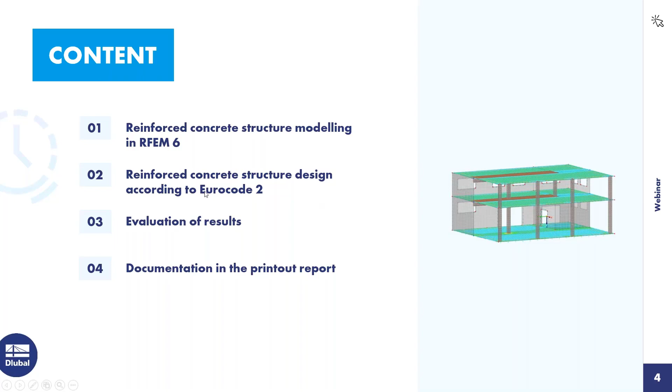I will document our calculation. I will go now directly into the structure, the RFEM structure. The structure was already defined from the members and the slabs. I'll only give you a short overview about the used objects.

The basics of the reinforced concrete design, and also the design of members, the reinforcement, definition of members, also the design by using the member representatives, if we have more similar members, was shown in the first webinar for reinforced concrete structures, which was made or shown in November of last year. There are shown the basic steps of how you can define the properties and the settings. My colleague Caroline will write the link into the chat where you can find this webinar. It is very good for the beginning.

So therefore, I will go now today into the design, especially to things which weren't shown in the first webinar. The punching design was not shown in detail, and also not the rib design.

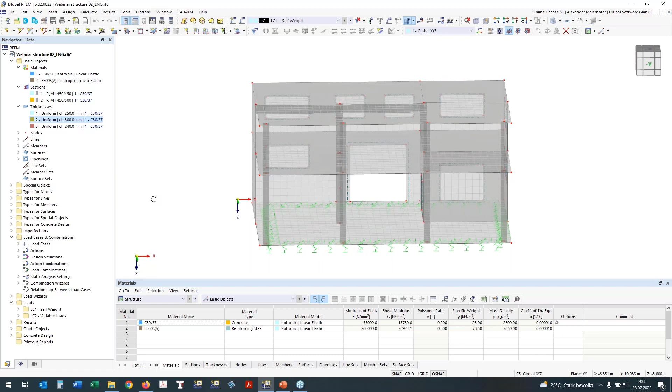The building now has elastic springs, so elastic support, and this will also have influence later in the settings for the deflection design, which I will show you.

At first, I want to deal with such nodes where we have the connection between the columns to the slab. Here we should place mesh refinements to have better FE mesh.

For this, I go to the data navigator, where by double click I can open a new nodal mesh refinement, give there my settings, which I have for radius 1 meter, and the inner target FE length is 15 centimeters. It comes from the dimension of the cross section of the columns.

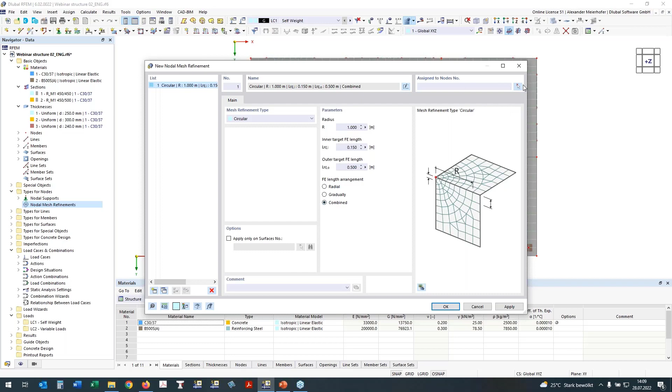For the length arrangement, I use the combined approach, and now I will assign the nodes with two rectangles where I want to have the refinement. If we take it through in the isometric view, we will see I have it catched, and everywhere was now my mesh refinement.

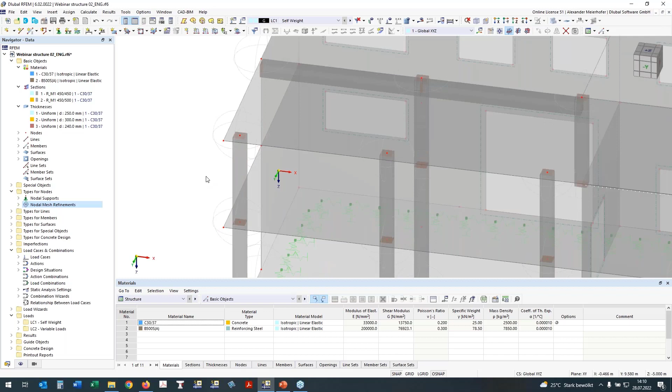On these nodes, from the column and the slab, we have also singularities, and how we can deal with these singularities in the concrete design is described in a very good knowledge base article on our website, which I want to advise you. Caroline will also send the link to this technical article in our chat, so you can find it very easily.

I will continue and select one approach, which is the use of the surface result adjustment. It means I will select or define the area which is exactly the width of the column, and set there the inner forces of the surface to 0.

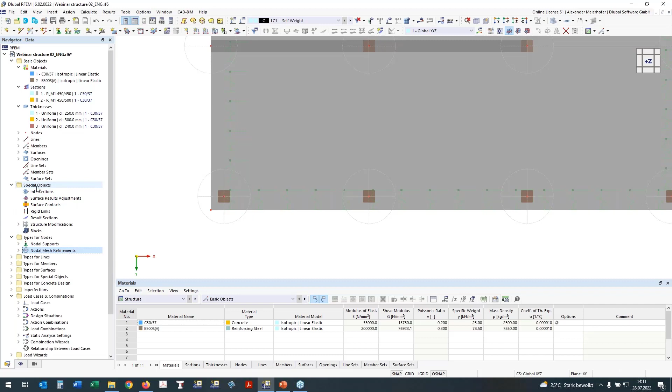Surface result adjustment can be found on the special objects. By double click, I can open the dialog, and now we can define a new rectangle result adjustment with the dimension of our columns.

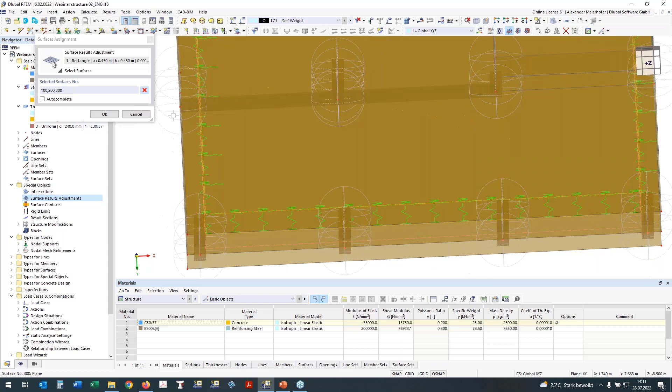I want to have it on all 3 surfaces, and you see the number of my surfaces was so chosen that I know where it is placed. So 100 is the slab on grade, 200 the slab over the ground floor, and 300 is the slab over the first floor. If I press OK, I have already assigned the surfaces, and now I have to define the center of my adjustment.

Here by copy, I can simply copy this adjustment and set only the new center of the result adjustments, and then I will have it in all areas.

I make one new and want to define it also over the wall. The width is 25 centimeters, and I defined a little bit bigger area, and defined it here because here is a wall. Define it also in this area.

I made one mistake. Now I forgot to define the adjustment type. I want to set it to 0, and I want to set all inner forces to 0. This should be done for all.

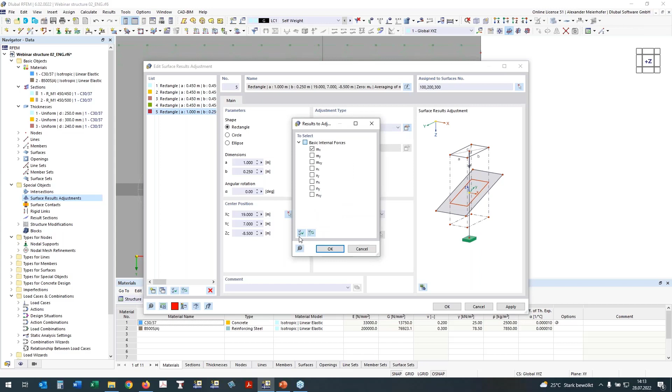To all defined adjustments. So I was one step too fast before. This should be done before I copy it, and then it is also always in the right setting. By OK, it will be placed.

We can see it, and we can also work here by drag and drop. We copy it by drag and drop. If we press the Control key, you can put it by drag and drop, and it's very simple to work with it.

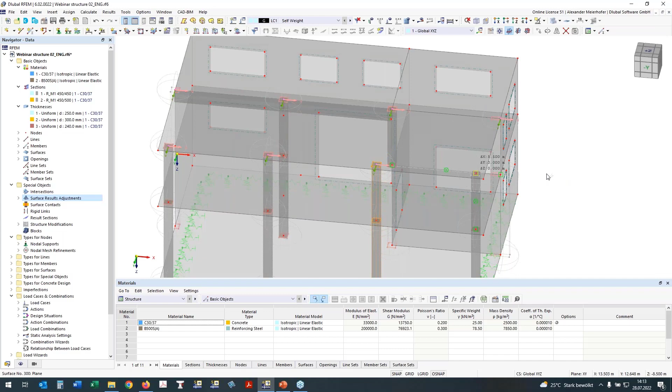So this is then for the connection of the columns to the slab. One additional setting for the slab is necessary. I want to have here hinges over the length of the supported line.

The definition is very simple. We make double click on the surfaces, and the edit surface dialog will be open. Activate hinges, and in hinges I click to select lines, press Control, and then I have selected 3 lines where I want to have hinges.

And the hinge type is by default already the moment hinge, and I will put it to all lines, the line hinges number 1. Okay, done. It's ready now, and if we take a look at our refinement, it is placed everywhere, and also the adjustment.

In the display navigator, we can deactivate the mesh refinements because I don't need it anymore for the work now, and the graphic is then more clear for the presentation.

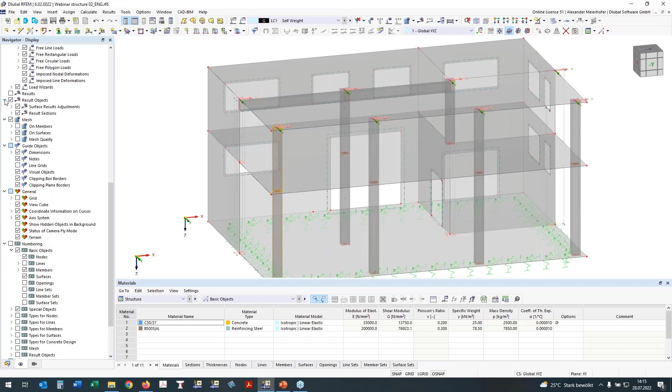As next step, I will define the rib for the slab over the ground. For this, I will hide the first floor by selection, and now I have the first floor.

By using new member, I can define now section rib by selection of the section number 2, which should be used for the web. The web should be 500 millimeter high.

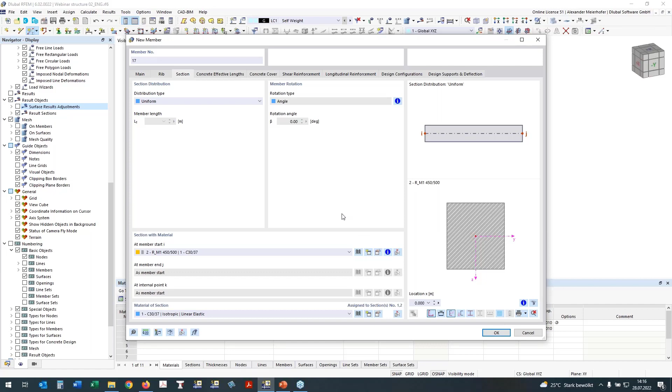I can define now the rib from here to here, and also from here to here. Oh, something was wrong, okay, I do it again.

I know what was the issue. I will make the selection new and select only the slab which I want to show. So the new member is the same section, section number 2, and then from here to here.

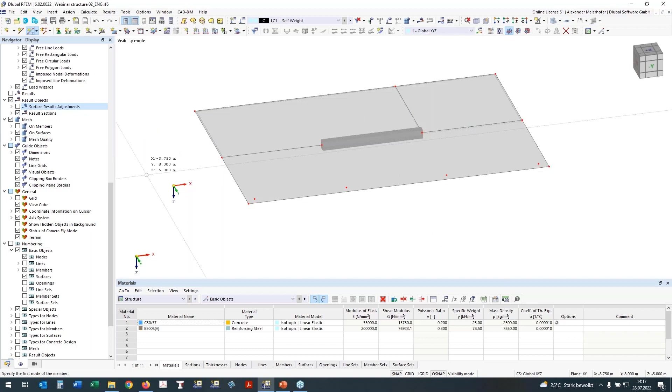By escape, I come to another point. So if we take a look at the complete view, in the first part I took care about the rib. I go now into the rib section, and this is a very new feature: we can now also define more sections or segments during one length of the members. This is completely new developed.

I use here the calculation of the width, integration width according to Eurocode 2, and the splitting of the segments can be done in 15%, 85%, and also 100%. Now we have more different integration points. Here we have an inner support, which means we have to consider for the calculation of the integration width the length of the neighbored span length. So I have to define here 1.80, and I have now my different integration widths.

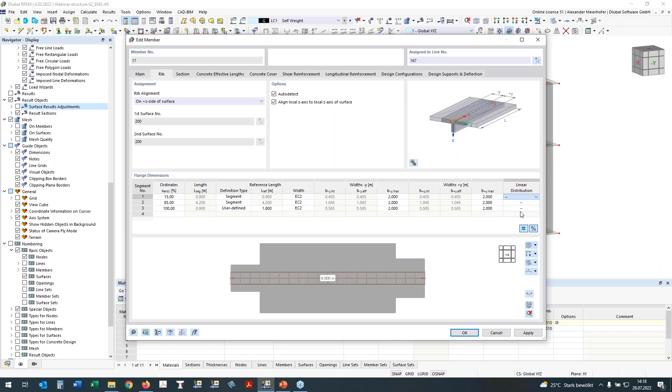We also have a new option here that we can make a linear distribution from the integration width, and now we have defined the rib for the design.

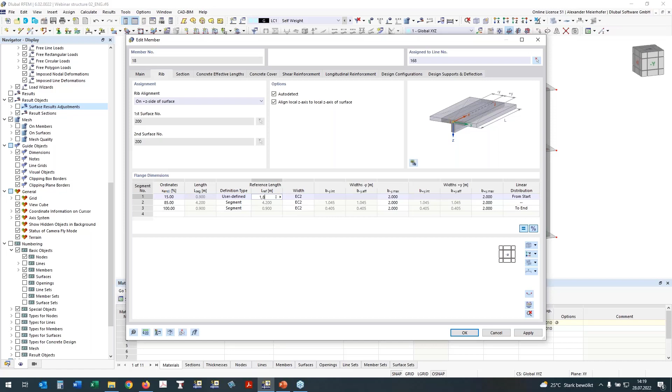For the second member, I use here the copy of object selections. It's a very nice tool. If I click here, we see that all inputs have really been copied, it's the rib, and the only thing I have to change is that the end field is related to the segment, which is for the user-defined 1.80. Then the inputs for the static analysis are ready.

And now I do it again, what I did before. A very nice feature from RFEM 6 is that we can now show the rib section also in the graphic, and we see that the integration width is also shown here in our main graphic of RFEM.

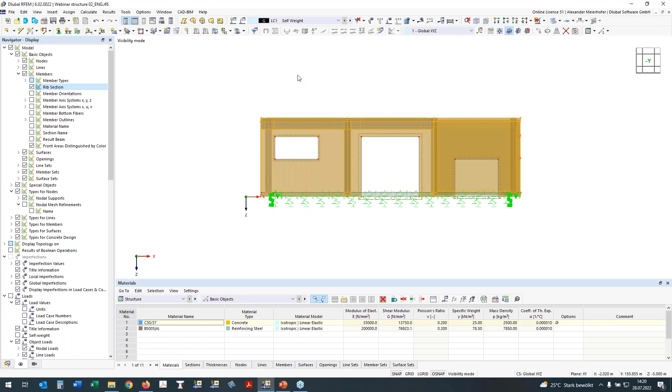Okay, now I will select again my slab here, and continue with the definition of the design properties.

The design properties for the reinforced concrete calculation are activated by double click. I come into the surface dialog, and I continue with the concrete cover. The concrete exposure durability is defined by the exposure class, which is default to XC1. This is what I leave, it's okay.

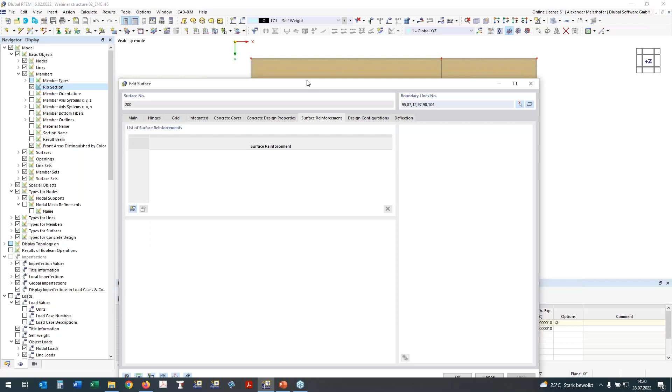The design direction of the reinforcement, the first direction, goes in X. This is also default, which I will not change. And here is one important topic: in the surface, I need a surface reinforcement for the diameters so that I will know the static depth for the calculation. I just design a type of basic reinforcement.

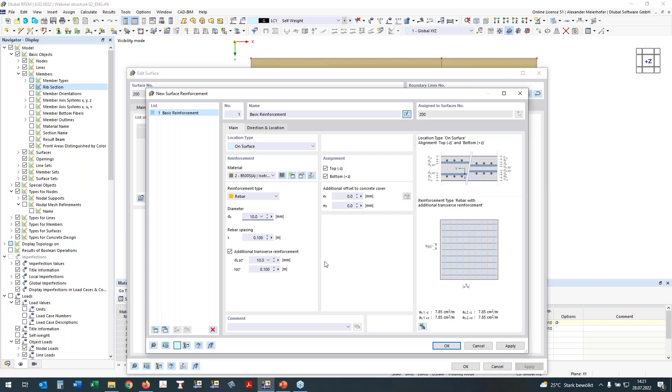Which will be in both directions, the diameter 10 with a distance also of 10 centimeters, and by pressing OK it will be assigned to the surface. Here are listed design configurations, which I don't discuss today.

This was covered in detail in the first webinar. I will later take a look at the serviceability configuration. But here's one very important thing which I mentioned before at the beginning: we have an elastically supported structure.

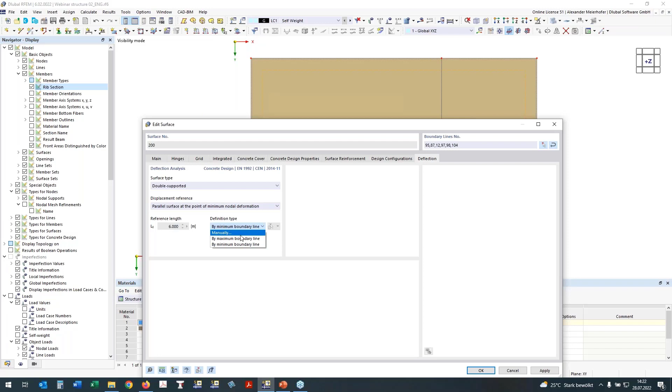Therefore, it is an advantage to relate the deflection also to a deformed slab or plane. Here I use the parallel moved slab as a reference plane for the deformation, and as reference length I will define it manually by 2 points, saying my reference length for the maximum allowed deflection is from here to here. It's about 5.5 meters. By OK, I have defined all properties for the reinforcement design.

We can also take a look into the graphic. If we go to the types of concrete, we see here we have surface reinforcement longitudinal, and if we activate it, we see that the reinforcement is defined in this area.

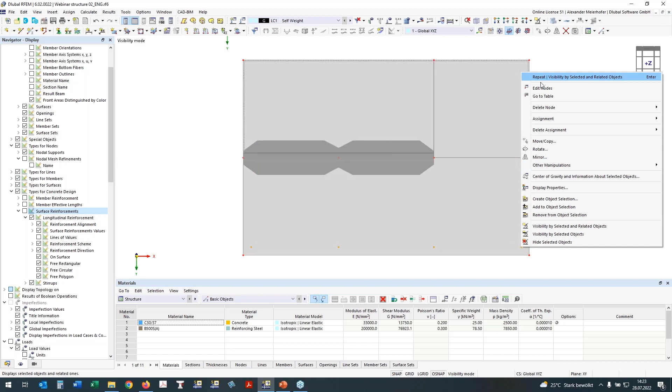Okay, I said that I will take care of the punching design of the nodes which are here. So as for all objects, we have to select it and go into the nodes or object dialog, edit nodes, and activate the design properties. Here it's only important for now that we check for design of the punching proof, and then we will have the punching proof assigned in the add-on concrete.

I will go now to the definition of the ribs. Here we need also reinforcement. I want to design not two members, I want to design it with a set of members.

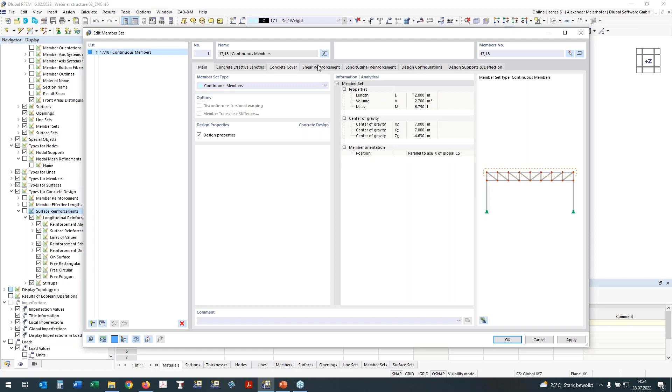So therefore I select both, press the Control key and say create a new set of member. And here we have now the new set of member, and I can say now design properties for this set of member, and we see that there was now open all inputs for the design properties. It means the concrete cover is now shown, and here we have also the same durability which we have already used for the slab.

Used for the slab is XC1 and the shear reinforcement. I will change the distance to 50 centimeters, and if we take a look in another view, then we see here the cross sections or the variable cross section of the rib is already shown here, and also there are the reinforcement, and I will go to the longitudinal reinforcement.

We see here the reinforcement which we have defined for the slab design or in the slab is here already placed. If we go more, we will see it. It is activated by this icon. If somebody doesn't want it, you can deactivate it or let it. I want it, so therefore I will let it here.

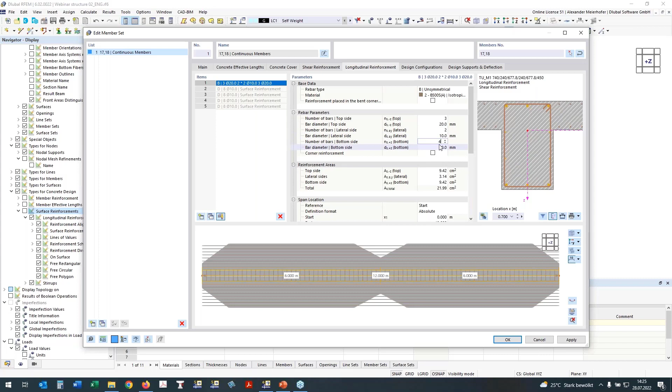But I will define now different distribution of the longitudinal reinforcement. I want to have it unsymmetrical here in the web. So therefore on the top side I will define here these three rebars with the diameter 20, but a lateral reinforcement also from 2 diameter 10. And on the bottom side I want to have 4 diameter 20. And it will be directly updated here in the graphic.

Here is also the 3D graphic of the reinforcement, which can be used for control of the inputs. Here we see a small reinforcement drawing, also the used shear reinforcement, which can be activated or deactivated. It's nice for control and for printing. Okay, I can close it.

Design configuration is the same like for surfaces in all parts, and now is one important tab. We have to define now the deflection properties or conditions. I want to check it only in the deflection in Z direction for the gravity loads, of course.

And here is the point: my reference is then the deformed segment ends. This is now also the point which I mentioned. We have an elastic supported structure, so it means also the supported ends will be a little bit displaced in Z, and this I don't want to have in the design check for the deflection.

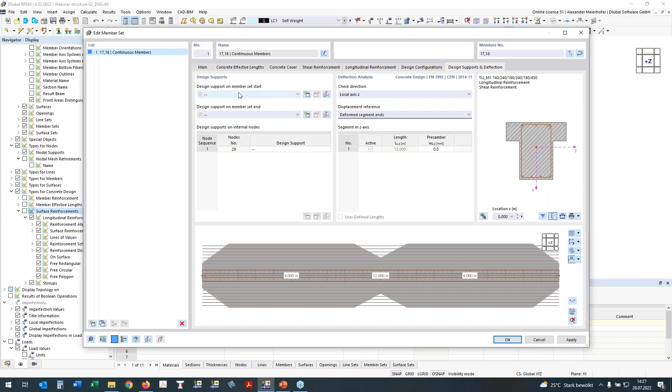Important is that I generate on the ends or on the middle some design supports. We have here design support in Z direction, and our wall is 250 millimeters. It's a monolithic connection, and will be used for the walls on the end and the start. I directly copy it and use here also the width for the columns, which are inner supports, and here I have to deactivate inner supports and press OK, and then it will be placed directly at the beginning.

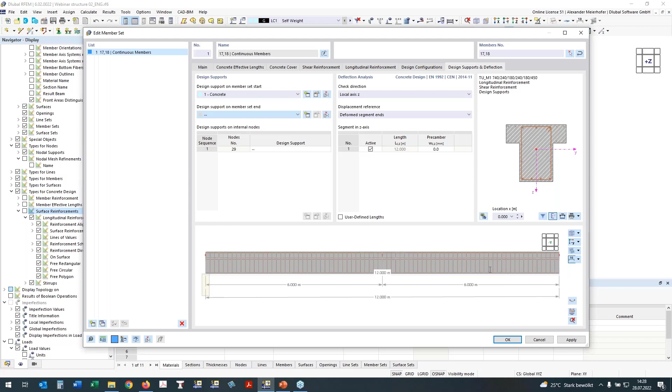I will change here the view to see it. Here we have the first one, and at the end it will be also placed, with the 250 millimeters width, and in the center I will also use the design support, but it is now for the column and it's bigger, it's 450 millimeters.

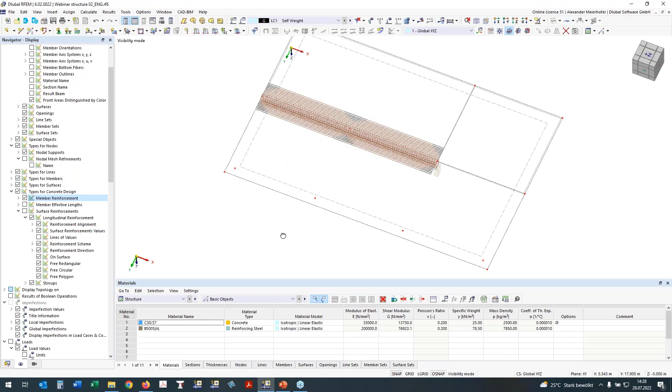And we see here now for deflection we have here some lengths, 6 meters and 6 meters, and if we have some pre-camber we could define it here, but in this case I don't have it. But okay, we can confirm the inputs, and also we can check the member reinforcement and display it, and see that everything is okay.

Before I start with the calculation, I will make now new object selections. Have to be a little bit bigger. Create new object selection, and the advantage which will be done with this object selection you will see immediately after closing the dialog.

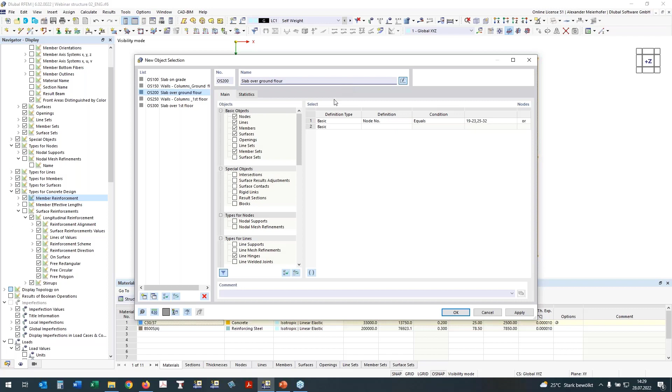This is my slab over ground floor, and I press OK. And now we have here in the object, in the guide objects, the object selections, and you see I have already done a little bit more, but the new one is the object selections number 200.

And if I go now to the concrete add-on, I can use the object selections directly to define all objects which are there in the add-on. It is then replaced, and it will only show object, and it is very good to organize the work.

Before I start with the concrete design, one hint where you can start, or what you have to check in the basic settings: you have to activate the concrete add-on in the design add-ons, and in the standards you have to define the used standard for reinforced concrete design.

Here I will use Eurocode 2 with the original rules, so without national annexes.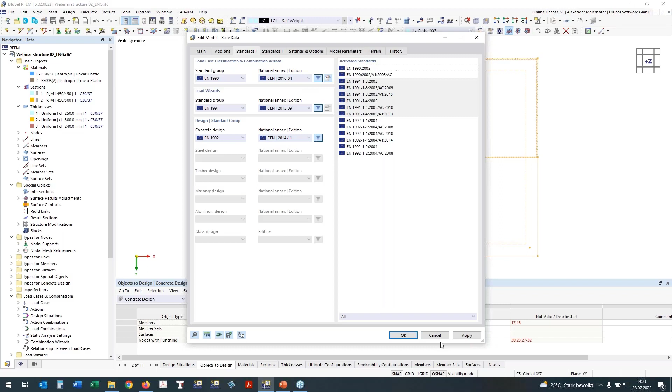If we have the loads, this is also one additional hint. I have defined a load case, self-weight and variable loads. We have to define the action category there - it's for the office. And in the base data, I have the combination group and the combination wizard defined.

And in the design situation will be automatically listed the serviceability and the ultimate limit state design situations.

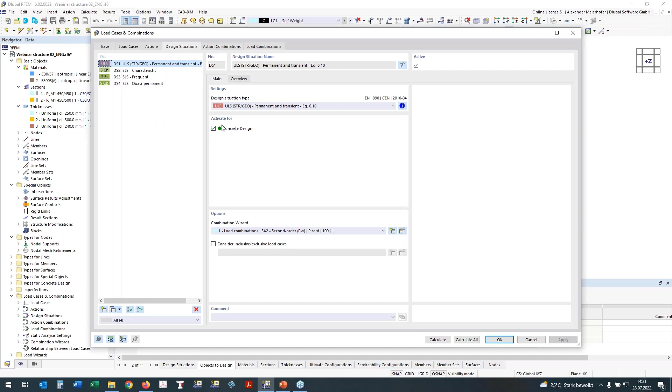Here will be the list of all activated design add-ons. Here we work only for the concrete design, so I activated concrete design, and all load cases which are related to this design situation will be calculated.

I can multi-select it, and what I have to do is select my combination wizard. The combination wizard is defined in this way that we generate load combinations, and the static analysis should be done by first order and geometrically linear.

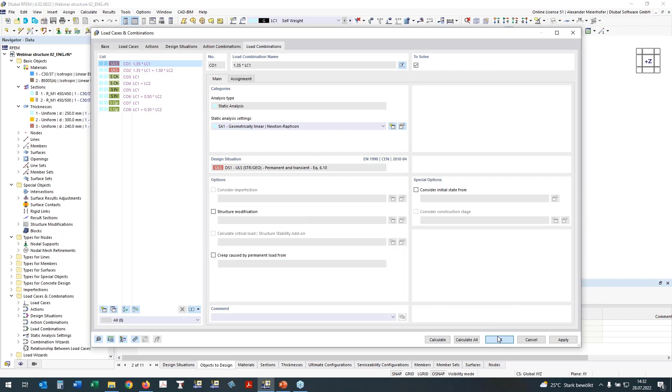If we go to the register load combination, these combinations were generated automatically and will be also used in the design of the reinforcement.

Now I go back to the add-on concrete. We have here already the designed object selections. Material and sections are only listed for control.

Here are the configurations or settings for the ultimate limit state. Here we have the serviceability state. I will take a look at the serviceability state configuration.

Here we have the stress check which should be done, or the crack analysis, done by finding automatically the limit value for the crack width. This is according to the defined exposure class - we have XC1, so I expect in the calculation 0.4.

With the deflection calculation, we have this L, the reference length, divided by 250. And here is the crack state detection for the serviceability.

I want to explain this a little bit more, because this is really new - we released it two weeks ago - so I'll take a little more time for it.

The first one is the crack state calculation for each associated load. So each load case or load combination will be considered and calculated for itself.

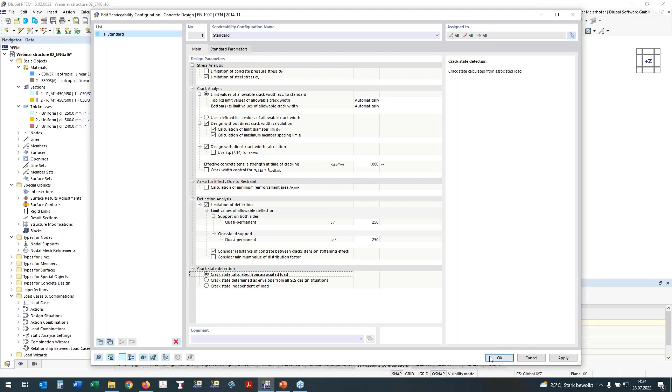I'll add it in the first setting and confirm it. Now I think we can start already the calculation.

Of the static analysis. So first the mesh will be generated, and as the next step the static analysis is done.

You see here we can now use more cores of the PC. I have 4 cores, and there will be 4 calculations done in parallel. It is very fast.

Here in the concrete calculation will be done a pre-calculation for the stiffness, checking if there are cracks or not. Then a second step of the finite element calculation is done, and the deflection is calculated.

In the last part of the concrete design, the cross sections will be designed, and the results will be prepared for display, in the tables, and also for the graphics.

Okay, so now we have an overview of what is fulfilled and what is not. We have very detailed tables. This work with the tables was also shown in the first webinar.

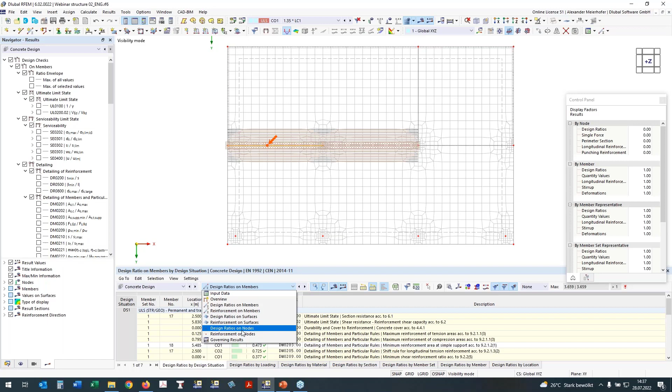Design ratio for nodes is also new, and this is the design ratio for the punching proofs, and we see here it's not fulfilled.

I will go now to the graphical results, and firstly we took a look at the results of the surface. I want to activate it as only extreme values, and here we have the panel showing the ratio of the defined reinforcement, the ratio between the provided and the needed reinforcement.

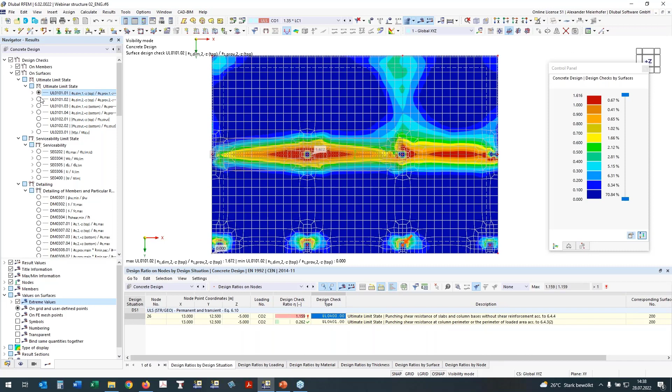In the red areas we have less reinforcement defined. On the top side there is also a punching problem, and I would expect more reinforcement for the punching design. If we look at the bottom reinforcement in the first direction, everything is green, under 1, except a small part with the maximum ratio. The second direction on the bottom reinforcement is also okay, with a ratio of 93%.

The punching proof of these nodes is now shown in the tree register for nodes. If we activate the vEd for nodes and vRd,c, we see the corner columns can be designed, but the columns in the center are overloaded and need more reinforcement.

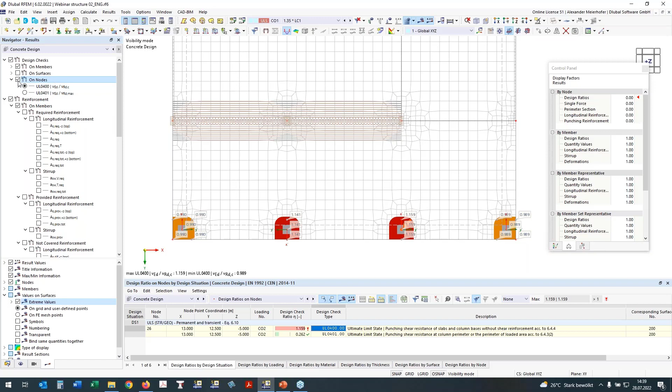To work with it, I will go to the reinforcement and take a look also at the nodes to show if we need a required punching reinforcement. Here we see for the required punching reinforcement we need zero, but we need longitudinal reinforcement. In the configuration I said please calculate the required longitudinal reinforcement to avoid shear reinforcement, and we see that if we place 12 or 13 centimeters, everything would be nice.

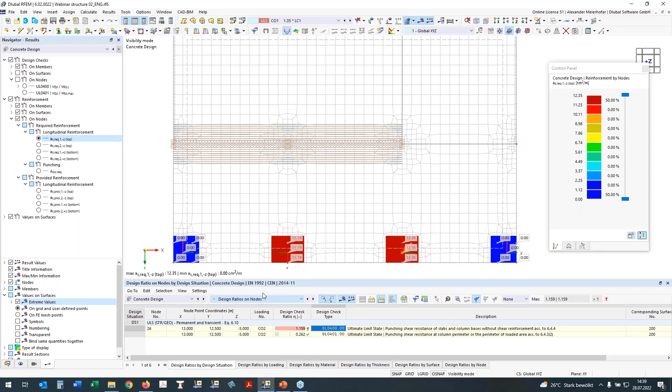I will now define the missing reinforcement. For this, I will go to the global settings of my module add-on and deactivate the deletion of my add-on results if I change the reinforcement. Now I can work in the inputs. I deactivate the mesh so that I have a nice view, and go now in the result navigator to my types for concrete.

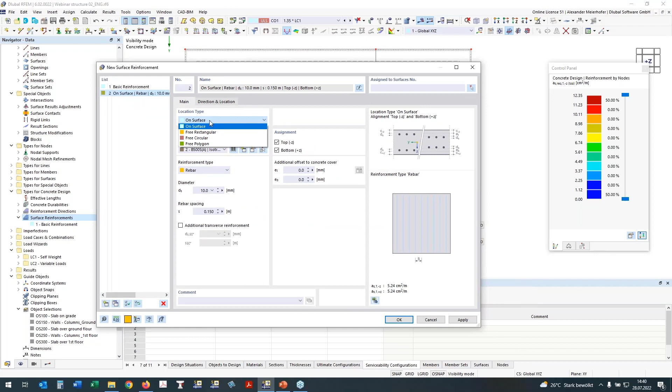For types for concrete we have the surface reinforcement. With new surface reinforcement I generate a new one, which is a free rectangle area. I assign it to my surface number 2, and the missing area here for punching is about 7.8, and I want to have it only on the top direction. Here is the area which I want to define. I activate my grid to have good coordinates, so I have a grid of 25 centimeters, and this area is already defined.

I copy it like it was for the advantage result adjustments of the surfaces, and I can really use the same concept here. Now I want to do the input also on the other missing parts.

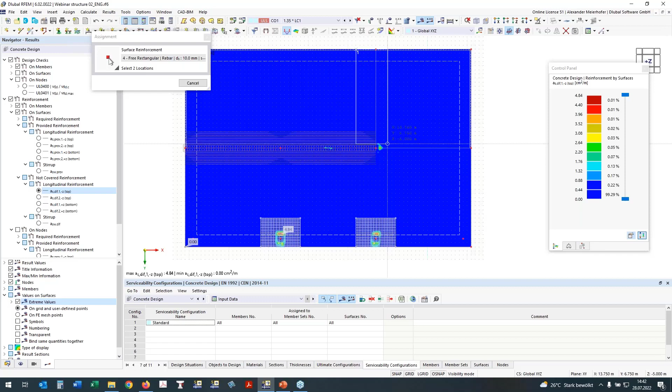For this I copy the existing one and go in the result navigator, so we can activate the graphic we want for surfaces, and say the surfaces have uncovered reinforcement on the top side in this direction. If we take a look here, I will define the same area over my supported line in the first direction, and in the second direction I will do the same area, and take a look what is here. Here I need some reinforcement too, and took it over this length.

It was a little too small, so you can also make it again, and by pressing OK it is then confirmed and in the structure.

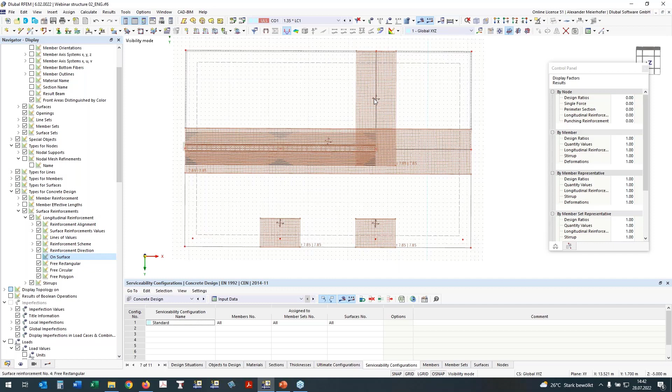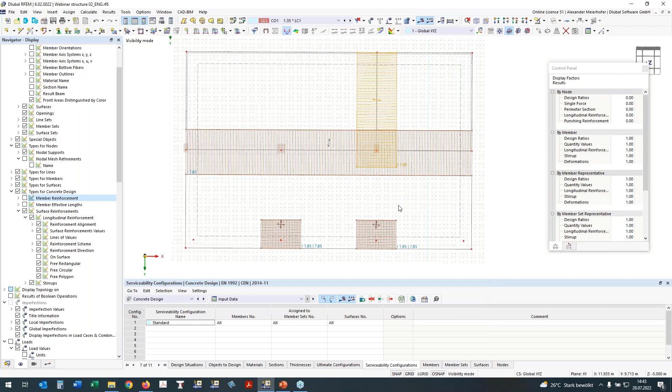For the surface, I can then take a look at where my surface reinforcement is. I go to the surface reinforcement and deactivate on surface, and we see what part of reinforcement is defined, and I can also check if the direction is right. Here I defined one thing too much, so I only want to have one direction, and it's the same here. By OK we will see I have only one direction. So easy is the definition of this additional reinforcement.

Now I want to take care about the reinforcement in the rib. For this I select it and change the view, and generate also a new object selection, which will be named the T section.

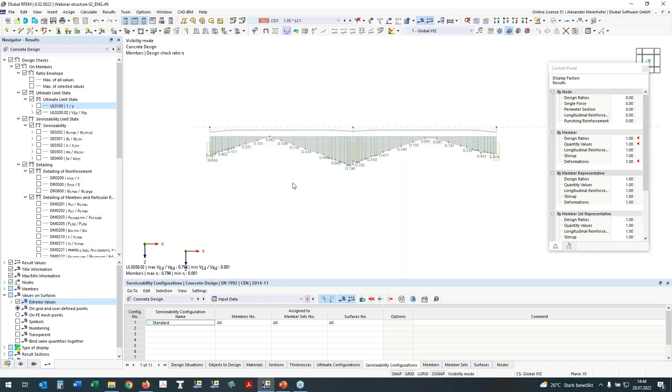Press OK. And here I work now with the design checks on members, and take a look how my cross-section resistance is. We see I'm under 1, so everything is nice. If I take a look at the shear reinforcement, the shear proof is also fulfilled, so I need no additional inputs. The serviceability is done in this way, that the stress of the steel is checked.

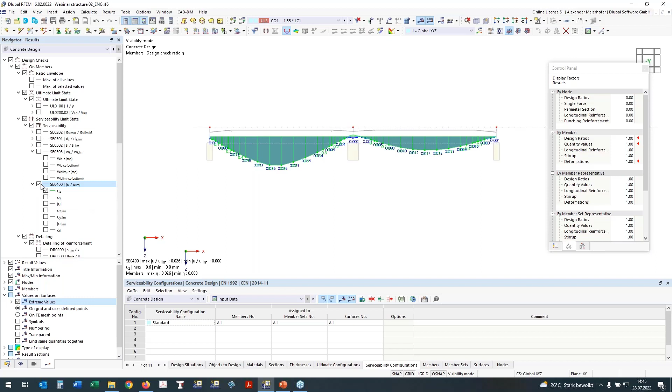You can activate here also the direct value of the crack width. For example, we have here only 0.026, and it is also for the deflection. The ratio is very small, and the existing deflection is now 0.6, and we see here it is related. Here is the end, it goes to 0, and this comes from the relation to the deformed structure.

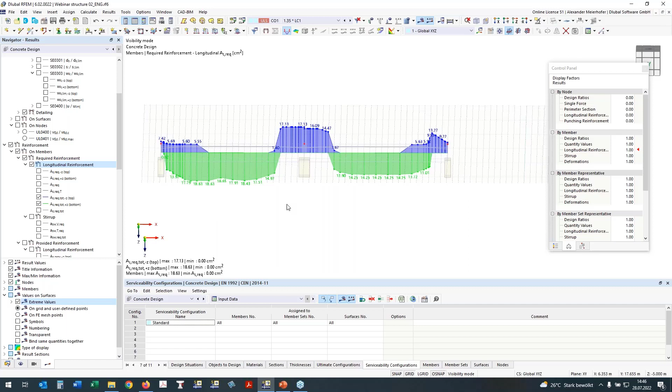Okay, if we take a look at the required reinforcement, it is also here in the table. Required reinforcement of members, As top, As bottom, and we can take a look at it. You have here the graphic.

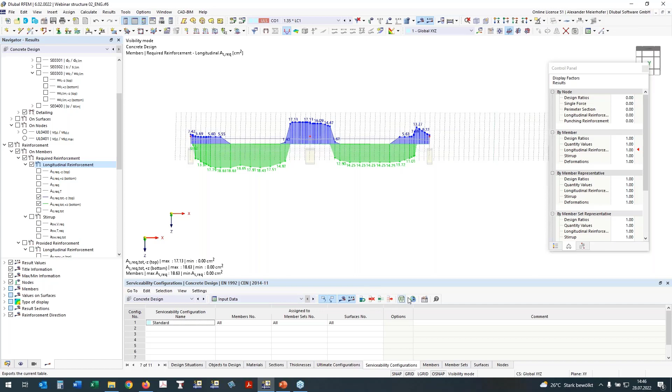If we want to print it to the protocol, we have to generate a new protocol. And what we have to consider is that the calculation must be done again. We change the reinforcement. For this, I go to the global settings, activate the deletion of the add-on results, and then it will be updated and deleted. Now I have to start the calculation of the concrete design add-on again. You can do it also here in this icon and start only the calculation of the add-on.

The statically analyzed results were not deleted because the reinforcement has no influence on it. Now it is only the calculation of the add-on concrete, which will be refreshed and done again. As I said before, this is a two-step calculation. In the last step, we have here also again a concrete calculation for preparation of the results and the graphic.

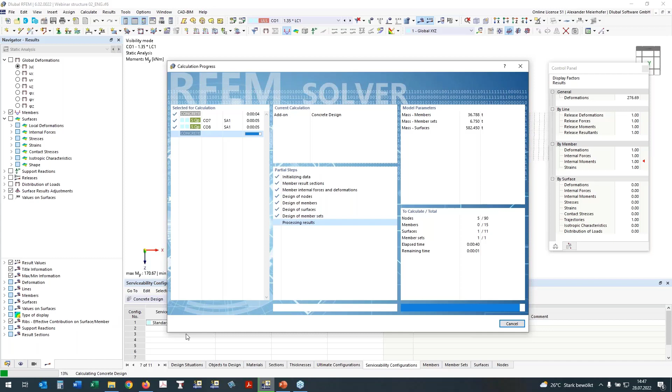So now we have the updated results. Design ratio by nodes, by members is okay. Then I will go to the printout report in the navigator and show you very simply the work with the printout report.

If we generate a new printout report, I make it here for the concrete results or the concrete design, and assume that all other documentation of the static analysis will be done separately in another printout report. Today I want to show only the design or the report of the concrete results. So types for members, types for surfaces we don't need, but types for concrete design is necessary for the concrete durabilities and the surface reinforcement.

What I also need is here the concrete design, which we have to discuss maybe also what is necessary. We see here it is possible to show every tab which is also available in the add-on. It can be printed, but I want to have here only the design ratio by set of members. For nodes and for surfaces, the reinforcement for members should also only be shown by member set, because I design only the member set. The provided reinforcement by member set, the not-covered reinforcement I will not show.

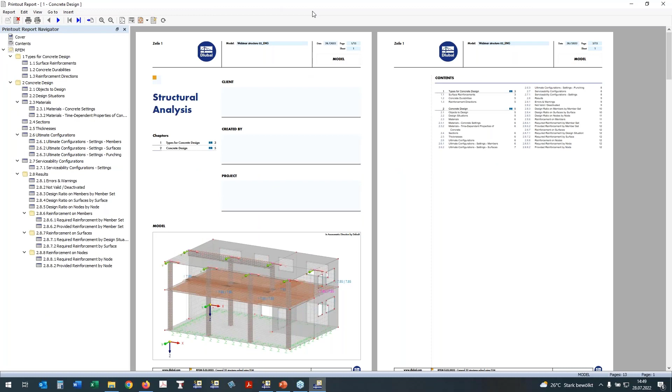For the reinforcement by nodes, I let it as it is. The design overview will be deactivated. By save and show, it will be generated, and the result, the printout report, is one of our new developments in RFEM 6. It is completely new. It is a separate file instance, which can be used here.

It can be opened parallel to the RFEM calculation, and if we take a look at our results now - result members - then we go through results of set of members. Here is one green, one is the crack control, which is overloaded - this we can check later. Detailing is 1%, it's okay. So from my side, it's okay.

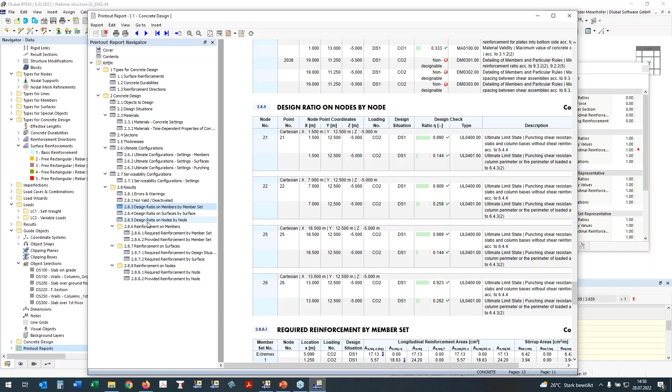For the design ratio of the nodes, the punching design - all ratios are fulfilled. If we go to the required reinforcement by member sets, we will see the list of the required reinforcement. Here I want to show also the point of how we can print the required reinforcement, because in my eyes a picture is better, a diagram, than many tables.

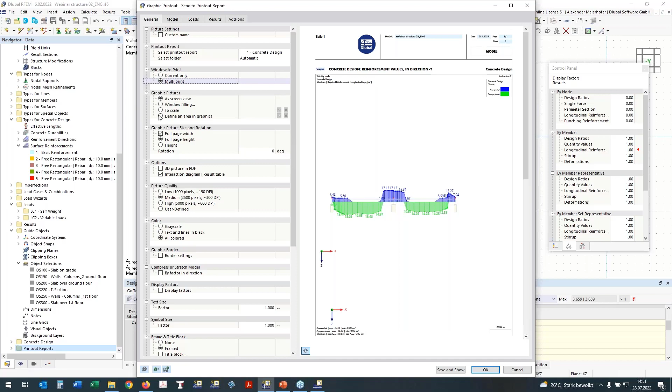Here we can use the printout report, the graphic, and here is the - I want to use the current one. New is also the possibility to define an area in RFEM to print it to the graphic.

By 2 points, I will activate the grid so we can move it and make it a little bit bigger.

This area will be saved and used for later. I make it a little bit bigger, and the panel should be outside of the graphic. By OK, it will be printed to the protocol. If we activate it, you can see it here, and make it smaller.

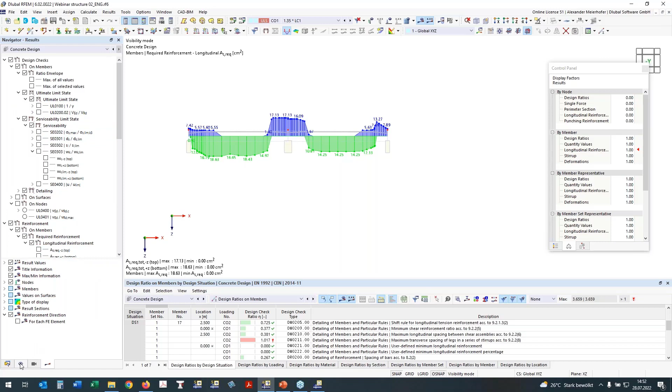Everything is here, and by using the inputs of the reinforcement, we can now deactivate the design checks on the required reinforcement and activate our member reinforcement longitudinally, using the descriptions.

With description, we can print it directly into the protocol using the same functions. The same icon will be pressed, so the area is the same. I don't change anything, and with OK, it will be printed.

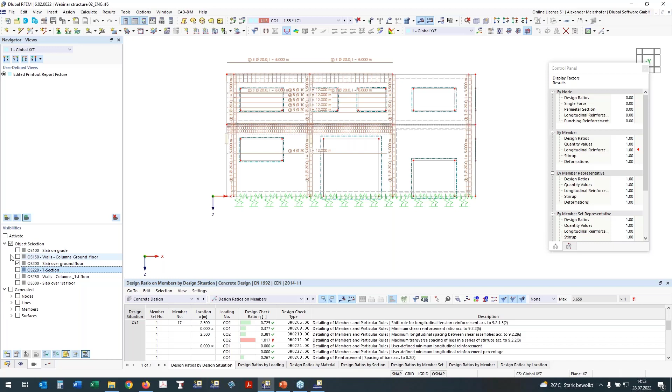Now I will take care of the slab. For this, I go to my view navigator, display view navigator, and this is the next advantage of the object selections. I have the slab over the ground floor, and if we take a look in the Z direction, now everything is activated that I selected before. I can continue with my presentation of the results for the slab.

Firstly, I deactivate my member reinforcement, and in the result navigator for the design checks of the surfaces, I go to the ratio of my longitudinal reinforcement on the top side. It is okay. The bottom was also okay.

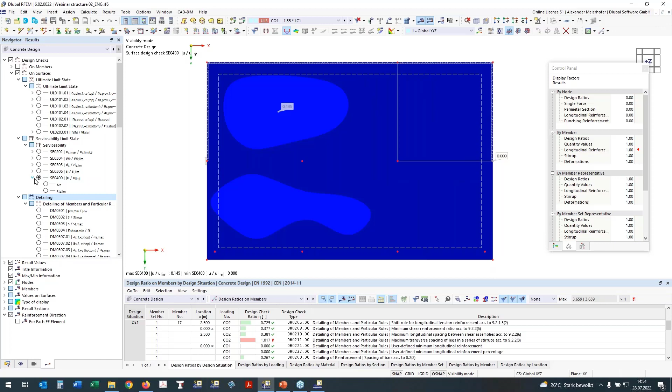We take a look at the displacement, so this is the ratio like it is for members, and here is also the deflection.

Important for me now is the punching proof, because this was not fulfilled before. We see it is now under one, the ratio. It's perfect. And we can now print a documentation of our results.

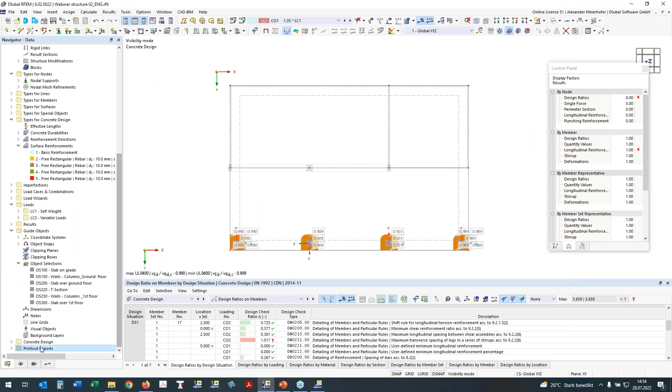I want to use a bigger paper like it was done in the documentation. The first printout report is format A4. I want to use a bigger one for the plots. I'll make a new printout report and say this is only my annex for plots.

For this, I deactivate all settings here and generate a new page format. I have to select a printer which is possible to print bigger pages. Here's my printer, which can print A3, but you need 7 millimeters distance on the bottom side, and I don't need some cover page.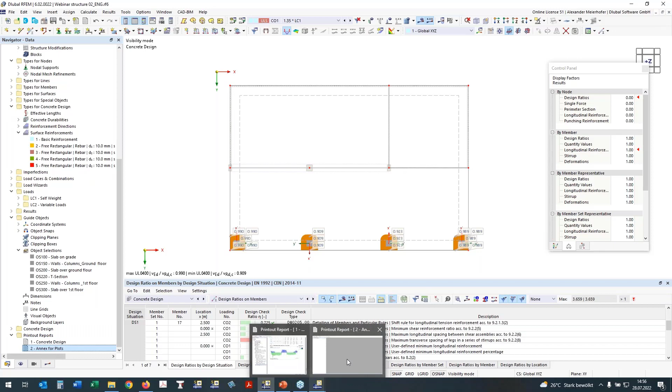With OK, it is saved, and save and show. I will get a new protocol, which is also shown here, but it's empty until now, because I printed no reinforcement or result there.

I want to use the same one again and print the surface here. You see the last view is saved. I want a new one, using it in Z, defining it in the new area, so from here to here. With OK, and with the multi-print like I did before, I can go to print all result diagrams which are necessary.

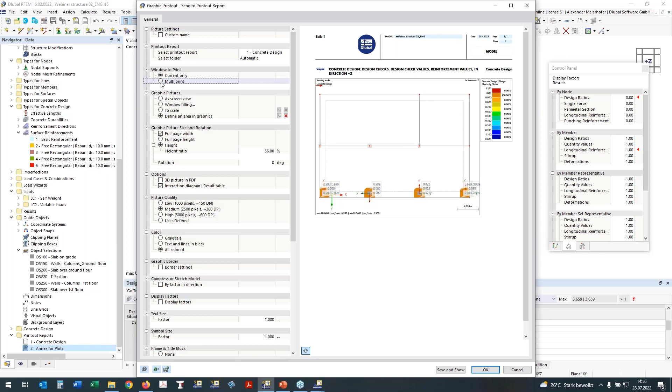Model is not necessary, load cases not here, and in the add-on. Now you see this navigator is really the same navigator as the result navigator in the main program, and we can print all results which we want.

So here I print first the ratio between the provided and the required reinforcement, then the crack width calculation with top and bottom crack width, then the deflection design check with UZ graphic detailing, which I don't show.

Required reinforcement, of course, I want to show my required reinforcement and also my provided reinforcement. For surfaces and for nodes, I need the required reinforcement on the top side, which must be placed for avoiding punching reinforcement and to fulfill the punching proof without shear reinforcement now.

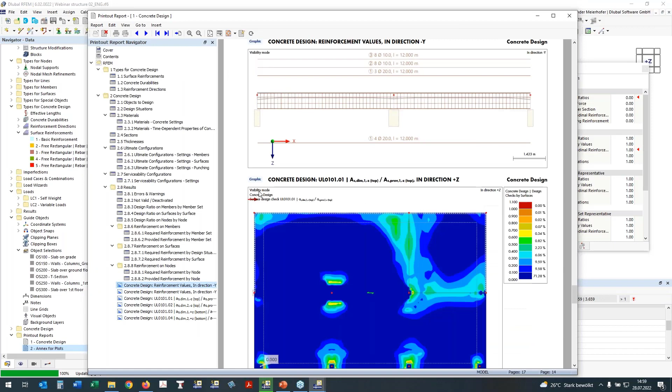Oh, this was my failure in the presentation. I selected the wrong one, so let us take a look here. The principle was the same. Let us discuss the result.

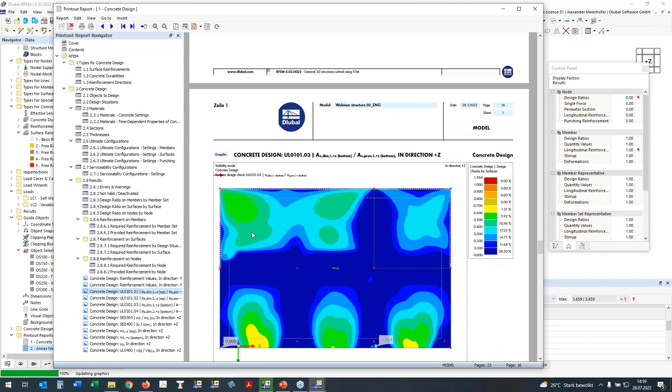It's now in the printout report number 1. Here we see the reinforcement. Everything is fulfilled, also the ratio of the top reinforcement and the bottom reinforcement, it's okay. Here we have the crack width and the ratio of the deflection, and here also the crack width on the top side and the crack width on the bottom side.

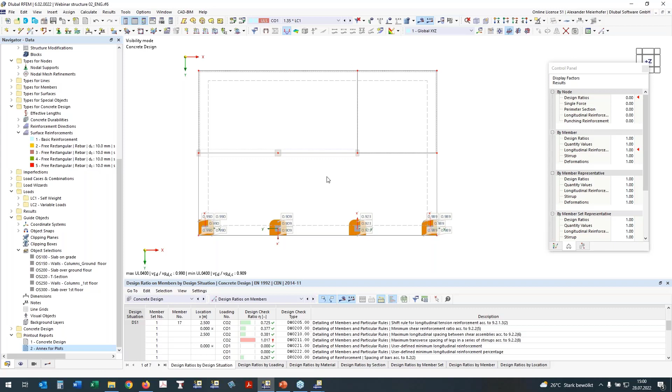Okay, this is then the design of this slab, and we are ready with the design of the member of the T section, and also for the punching nodes. I want to show you also the punching design of the foundation slab, where it is a special case.

Here we have to integrate the critical perimeter. Where is the critical one? It's not 2D, it's iterative. So we also need to consider the soil stress under the ground slab, and this will be done now automatically.

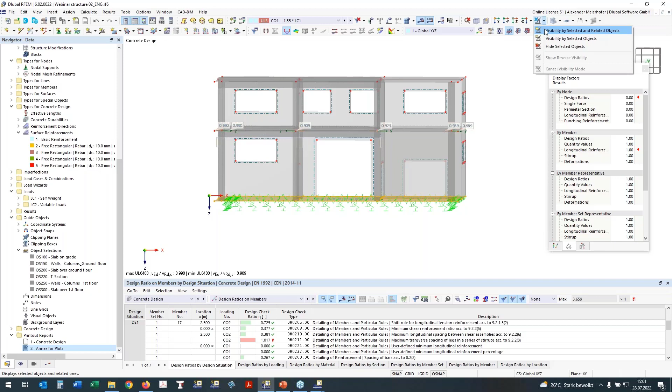I do it in the same way that I select only now our slab, take a view in the Z direction, same as what I did before in the presentation. I have to go to the node and say it's my punching design. Of course, I have new properties.

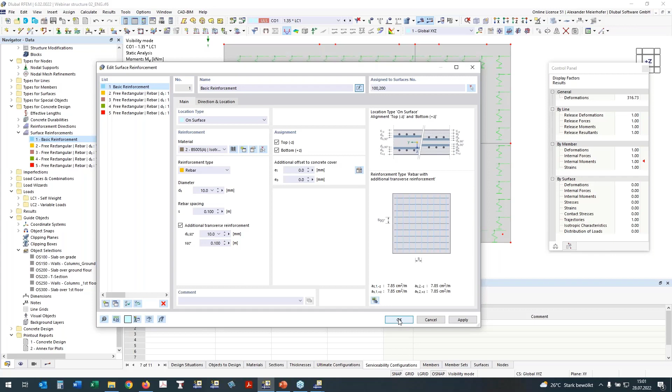Now I will delete the results. Further, I have to define the reinforcement in the slab so the punching proof can be done. This is very simple in the basic reinforcement. I use here the number 100, which I mentioned before. This will be my slab over the ground.

Then we can start the calculation of these points if we remember. If we remember, we have different types of the punching design. We have a wall at the border or edge of a slab, a corner column, a column at the edge, and a wall corner in the center of a slab. And here we have an inner column in the center of a slab. This will be done automatically in the design.

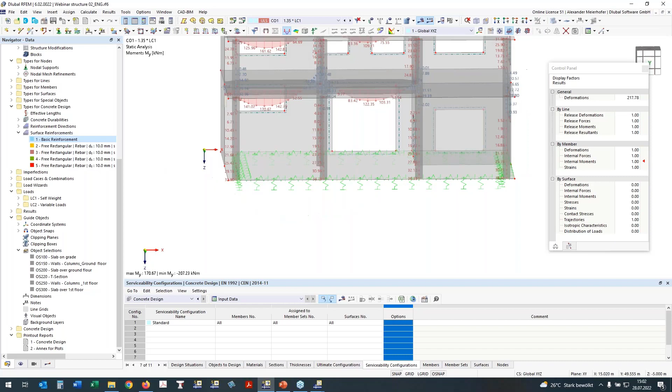I will go to my concrete design. This is now only for presentation, to show how the iteration will work. I will go the same way as before. Say, please design this node for the punching design. Member sets I don't want, and press OK.

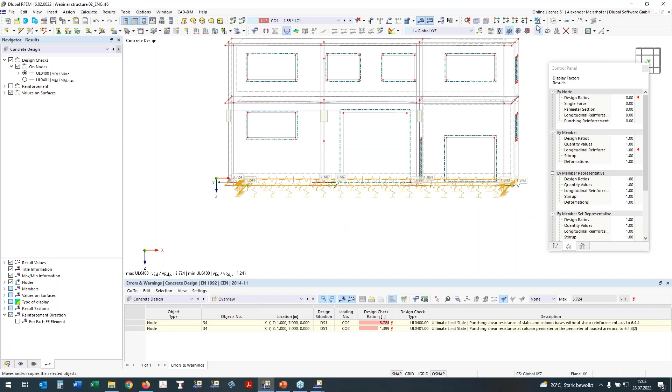Now I will calculate the punching proof for this node on the foundation slab. I'll go to another view, Z direction, it's better. We see that the wall end is found, the property or geometry is founded automatically. It's a wall end. Here we have the columns, and here we have a corner.

We see also the result of the iteration of finding the critical section. Here it's a very small distance, and here we go until 2D. This means that the reinforcement is not enough, like I discussed before.

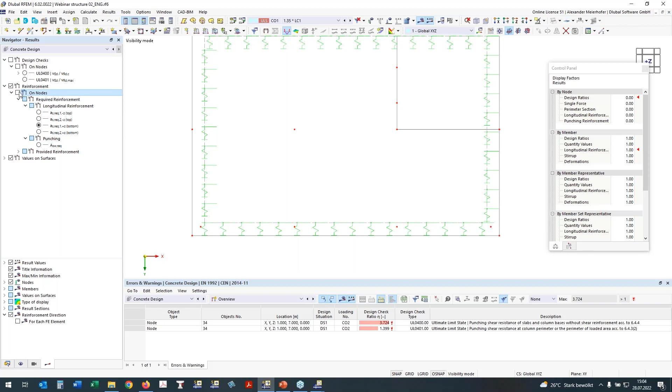If we take a look at the required reinforcement of the punching node, we will see if we need a punching reinforcement or if it could be done by some additional reinforcement. We need no punching reinforcement. We can use it and add punching additional longitudinal reinforcement. So the punching design for a foundation slab is now implemented and can be easily used in your daily work in the design of concrete structures.

Okay, this is an additional topic or feature which I wanted to show at the end of my presentation. I will finish and close my presentation with the picture of the punching design of the soil slab. Thank you for your attention.

Thank you, Alexander, for your presentation.